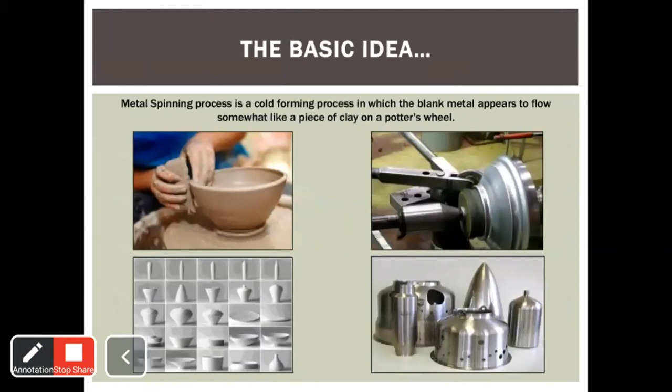Okay, so this is the basic idea about spinning. All of you just have a look at it. Metal spinning is a cold forming process in which the blank metal appears to flow somewhat like a piece of clay on a potter's wheel. So spinning means shaping a metal blank as it revolves at a high speed in a lathe.

It is one of the oldest methods of producing a wide range of goods which have an axis of rotation. For small batch production, spinning, because of the simplicity of the equipment needed and the ease with which a chuck can be prepared, often gives lower overall production cost than any other alternative method.

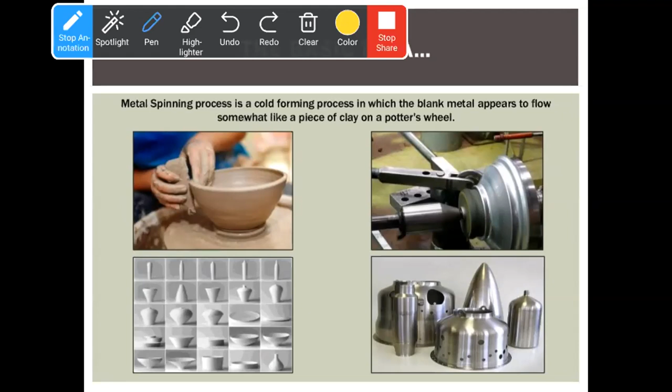So the process lends itself to the production of goods direct from a flat blank. It is also a very useful adjunct to the press and drop stamp. In the latter direction, it is used to finish articles that could not readily be handled by any other means. Hence, the spinning lathe is often used along with the press or drop stamp, or to trim, bead, burnish, or stroke over, neck down or spin a raising, cupping, or shell to the desired size and shape.

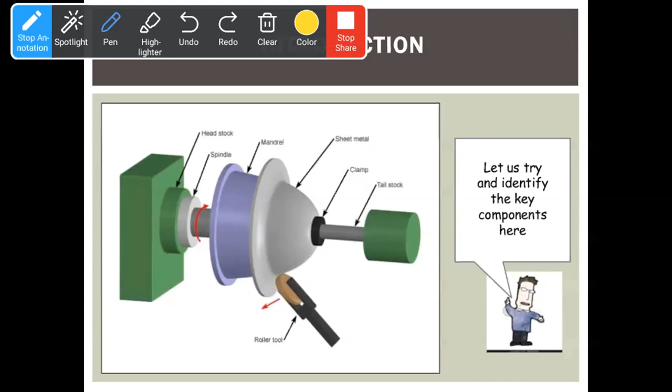In practice, metal spinning may be roughly grouped under two categories. So we can define this in this way. Here we basically have a metal disc or cylinder rotated at high speed on a CNC lathe or by hand, and by using specially designed tools, we get axially symmetric products.

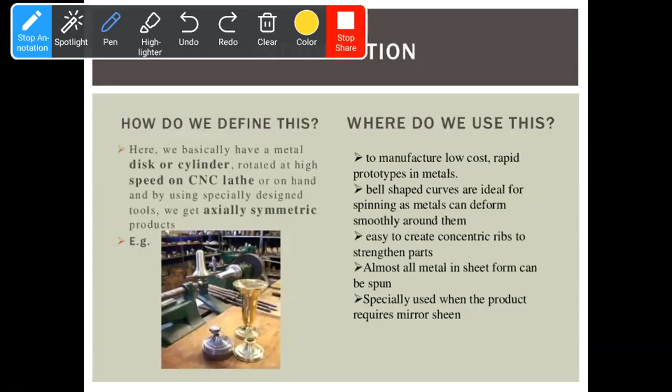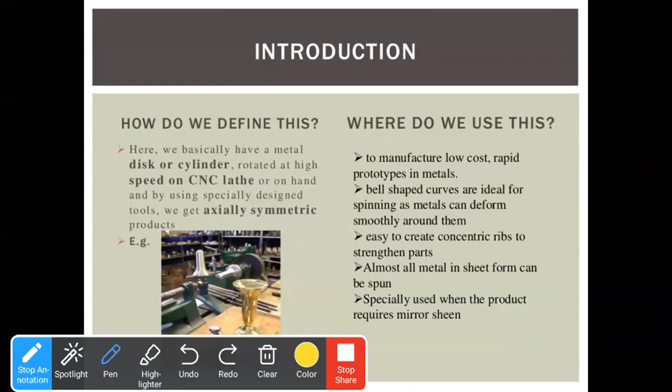Example - you can observe here. This method is used to manufacture low cost, rapid prototypes in metals. Bell-shaped curves are ideal for spinning as metals can deform smoothly around them. It's easy to create concentric ribs to strengthen parts. Almost all metal in sheet form can be spun, especially used when the product requires a mirror sheen.

So this is the everyday examples we can observe in our daily lives about spinning. This is the Coca-Cola can you can observe here. I always wondered how these commonly seen objects are made. Now finally I got these things - you can observe here. This is the Coca-Cola tin. You can see this is made by using spinning. This is the actual process working in our manufacturing department.

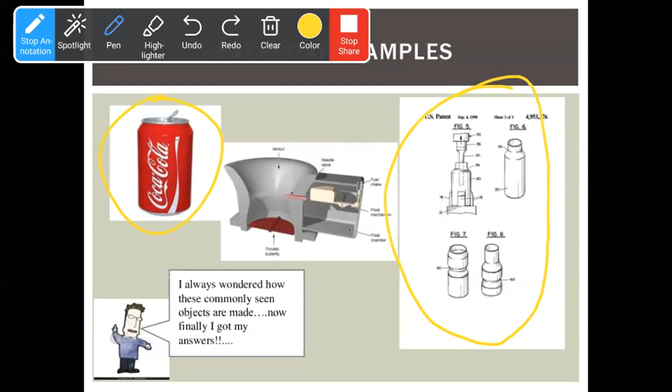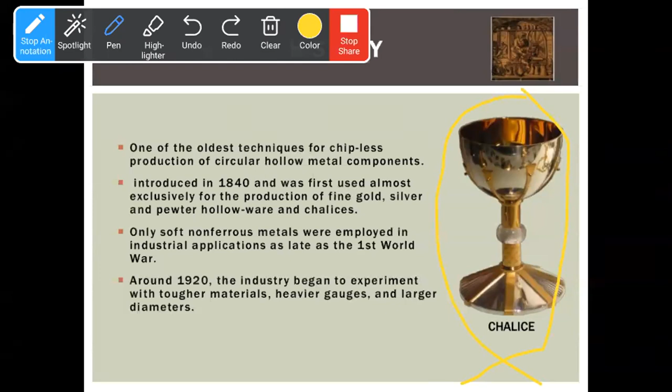Only soft non-ferrous metals were employed in industrial applications as late as the First World War. Around 1920, the industry began to experiment with tougher materials, heavier gauges, and larger diameters also.

So this is about the classification of metal spinning techniques. In metal spinning, one is conventional spinning, second is power spinning, and third is tube spinning. Conventional means nothing but manual hand spinning, practiced by pressing a tool against a circular metal preform. It involves no significant thinning of work metal, essentially a shaping process used for prototype manufacture or in production runs less than 1,000 pieces.

Coming to power spinning, metal is deformed using high shear forces, with use of automated CNC machines, significant thinning of metal preforms, suitable for high production runs.

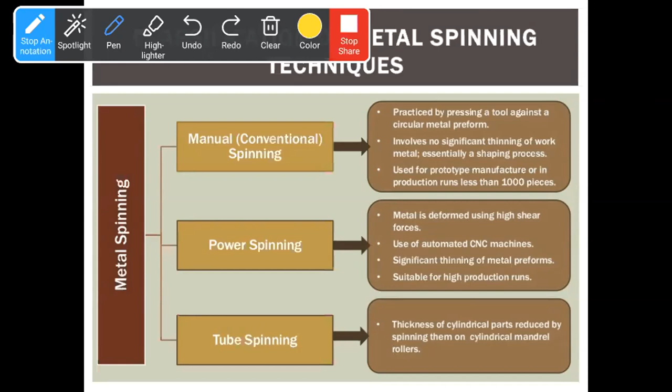Coming to tube spinning, the thickness of cylindrical parts is reduced by spinning them on cylindrical mandrel rollers.

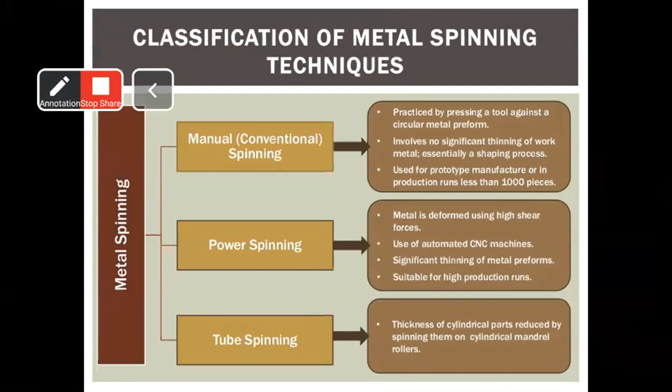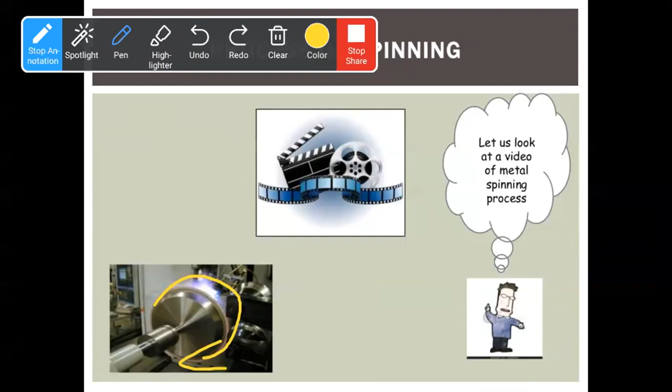So coming to this is the process of spinning. A disc of metal is revolved, as we already discussed.

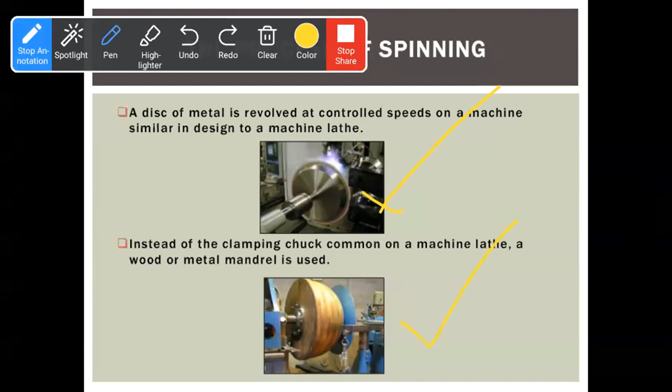A disc of metal is revolved at controlled speeds on a machine similar in design to a machine lathe. So this is one diagram, and this is another diagram. Instead of a clamping chuck common on a machine lathe, a wood or metal mandrel is used. And this is the process of metal spinning.

The external shape of the mandrel corresponds to the internal contour of the part to be produced. So this is the actual required part, and this is the supporting one. It gives shape to the particular sheet we have taken here. The blank is clamped between the spinning mandrel and a follower on the tailstock spindle. The mandrel, blank, and follower are then set in rotation at controlled speed.

So here are the spinning tools. Spinning tools or spinning rollers are forced against the rotating blank. In hand spinning, the blank revolves at high speed and is subjected to pressure from a steel tool exerted by the operator, who has the tool handle tucked under his right arm.

The tool is levered off a T-rest and is prevented from slipping by means of a peg. The leverage obtained is adjusted to suit the class of work being handled.

Skill in the use of these tools and experience in handling the varying classes of material is essential. If the metal is worked only in one place, it becomes work hardened, and the result may be cracking, buckling, or even tearing of the metal.

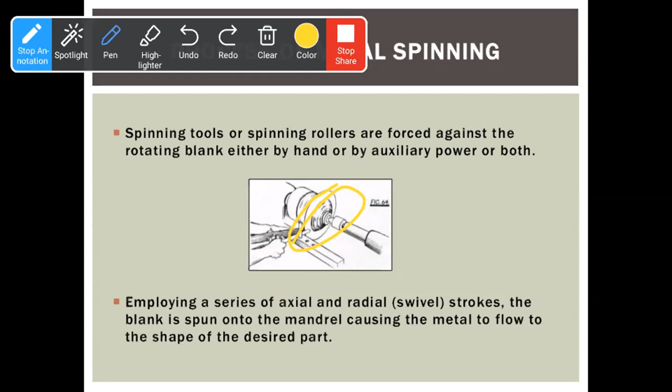The art in metal spinning lies in working the tool over the whole surface and coaxing the metal towards the desired cross section. As the work proceeds, the surface becomes work hardened, and it is necessary to resort to interstage annealing. So this is about hand spinning.

So this is the step-by-step process we follow in metal spinning. The first step is metal forming, the second is trimming, and the third is finishing.

What is happening in the first step, metal forming? This step involves laying down the material onto the mandrel. It is accomplished with short inside-to-outside moves, and the metal gets easier to form as the part gets closer to completion. So here you can observe this.

Coming to finishing, the third process, finishing is done at a very high RPM. That is, the maximum speed of the spun tool is almost 1200 RPM, so that a minimum of force needs to be applied and very smooth strokes can be used. The flat side of the duckbill spinning tool is used for straight surfaces, and the rounded side for curves and radii.

So coming to the mechanics of spinning, the most common application of metal spinning is for conical shapes.

Before knowing about the mechanics of spinning, we must also know about machine spinning. Machine spinning is very similar to manual spinning, but is always used in conjunction with a press to perform operations that cannot be readily done on the latter type of machine.

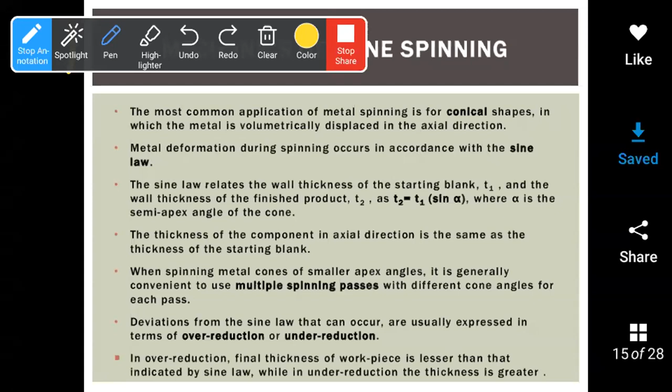The rollers are best made from a good alloy steel that will take a hard surface. For some jobs, a rocking slide is also fitted to the machine and used along with the compound rest. This permits such operations as trimming, as we have already discussed, and trimming and beading to be done at the same setting as spinning or burnishing.

One more thing to observe: spinning can be hand spinning, machine spinning, or hot spinning. So what about hot spinning?

Hot spinning of metals is similar to hand spinning, but it is used commercially to dish or form thick circular plates to shape over a revolving form block. A hot spinning machine is a combination of a vertical press and a large vertical spinning lathe which rotates about a vertical axis, so the power activated rollers do the forming as the part is rotated.

Metals up to 150 mm thickness can be hot spun. All of you keep a note of this: spinning of metals up to a thickness of 150 mm is routinely known for hot spun dished pressure vessels and tank shapes.

Hot spinning is also used to shape thinner plates of hard to form metals like titanium, which is one of the hardest materials.

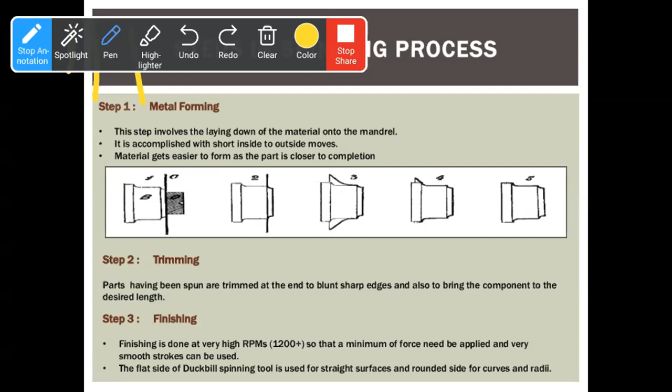Now about the advantages of the spinning process: some complex parts of reentrant shapes, such as kettles, can be produced economically. The second advantage is that equipment cost is very low, and the third advantage is low tool cost.

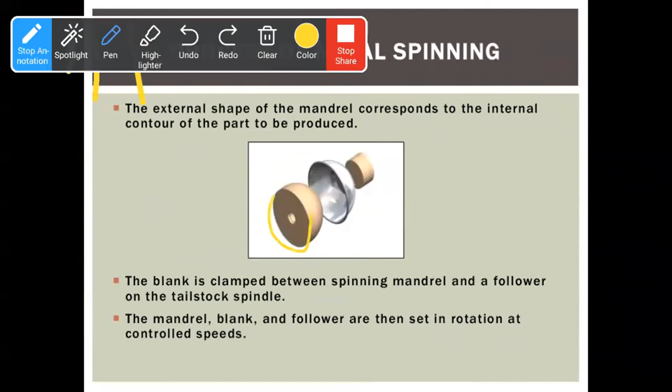We have already shown this form block here. This form block's cost is very low — that is the tool. And this is the sheet.

The external shape of the mandrel corresponds to the internal contour of the part to be produced. The blank is clamped between the spinning mandrel and a follower on the tailstock spindle.

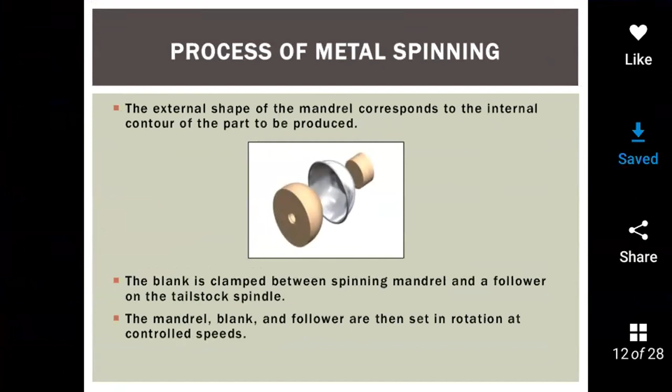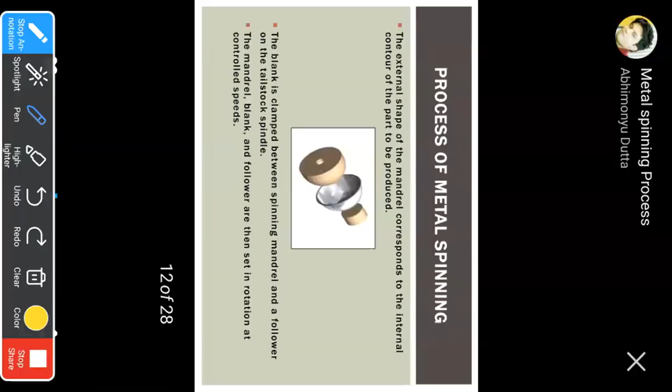The blank is clamped between the spinning mandrel and the follower on the tailstock spindle. The mandrel, blank, and follower are then set in rotation at a controlled speed.

There are some limitations here: finished parts are not always uniform, close tolerance cannot be maintained using spinning, and the spinning method depends to a large extent on the operator's skill. These are the two disadvantages or limitations, whatever we call them.

Coming to the applications: product applications of spinning include funnels, large processing kettles, rocket motor cases, reflectors, kitchenware, bells on musical instruments, etc.

We can compare spinning with drawing. Spinning is comparable to drawing for making cylindrical shaped parts because of the simple tools used in spinning. It is economical for smaller lots, but the time required for making a cup is more in spinning, and more skill is required in this process.

Thus, it is not suitable for large scale production. Complicated shapes and reentrant shapes are not feasible by drawing, but can be made by spinning using sectional and collapsible form blocks. Large parts are also much more easily made by spinning than by drawing.

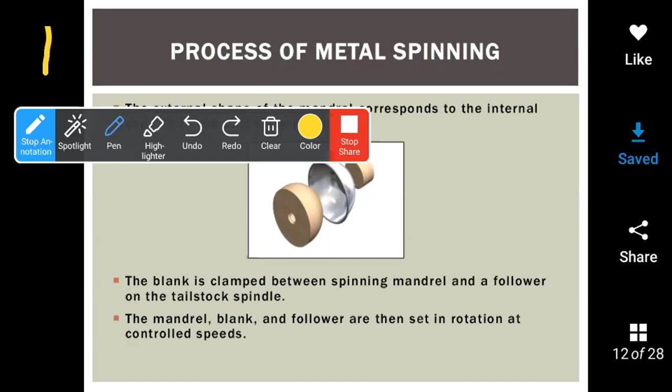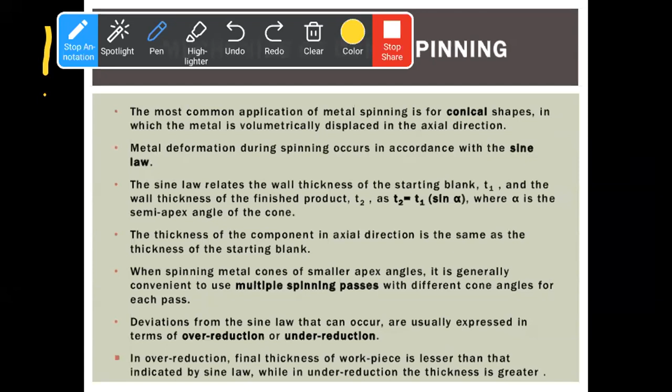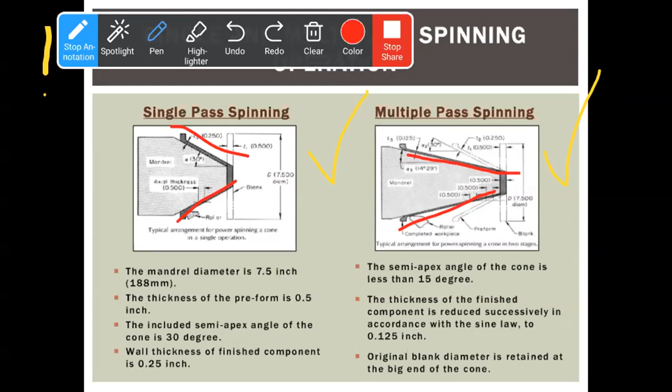The thickness of the finished component is reduced successively in accordance with the sine law to 0.125 inches. So original blank diameter is retained at the big end of the cone, at the big end of the cone.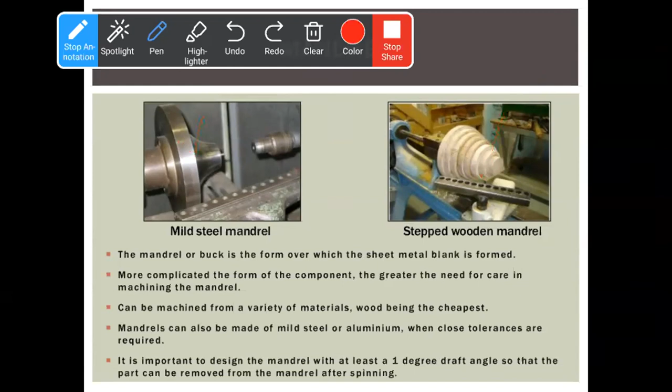So this is about the tools. Variety of tool profiles can be implemented for spinning the material into different shapes. Tools are provided with long handles to provide ample leverage to work the material down the mandrel. Tools can be up to 3 feet long with a 1-inch diameter steel rod forged into the preferred tool tip.

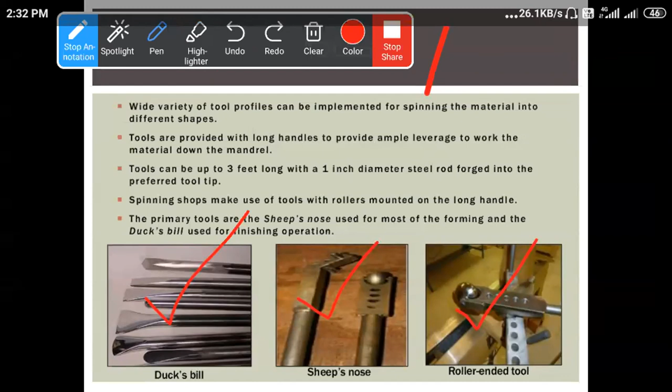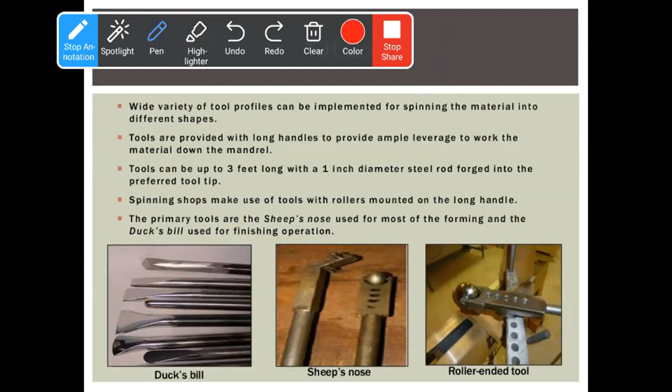You can observe here, these are all the duck bill. So you can observe this is the duck bill, this is the sheep's nose, and this is the roller ended tool. So these are the applications. Spinning shops make use of tools with rollers mounted on the long handle. The primary tools are sheep's nose used for most of the forming, and duck's bill used for finishing operations.

So these are all the lubricants we use in our spinning process. Lubricants are very essential in all metal spinning operations, regardless of the preform shape or composition or the type of metal spinning tools that are being used. They facilitate easy removal of the part from the mandrel and also help improve surface finish

of the finished component. Parts are lubricated both before and during the spinning operation. Commonly used lubricants include wax, tallows, soaps, and grease. So in selection of the most suitable lubricant, the ease of removal of the same after the forming process has to be considered.

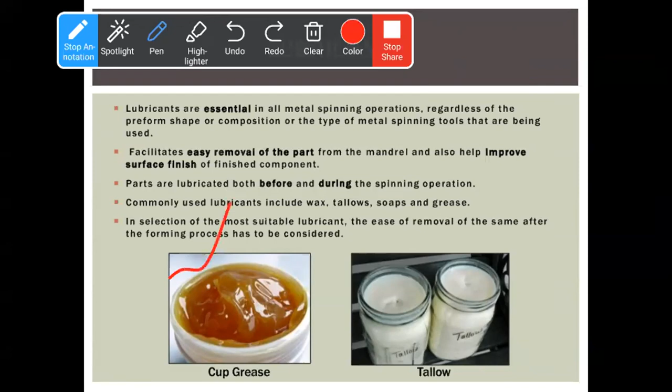So this is the cup grease, you can observe. So this is the tallows. So these are all different types of lubricants.

So machines for spinning - what are the machines for spinning? Machines for spinning are specified by the diameter and length of the largest component that can be spun. They are also specified by the maximum load that can be applied to the work. The capacity of the spinning machines ranges from 0.455 meters in diameter and 0.380 meters in length to 6 meters in diameter and 6 meters in length.

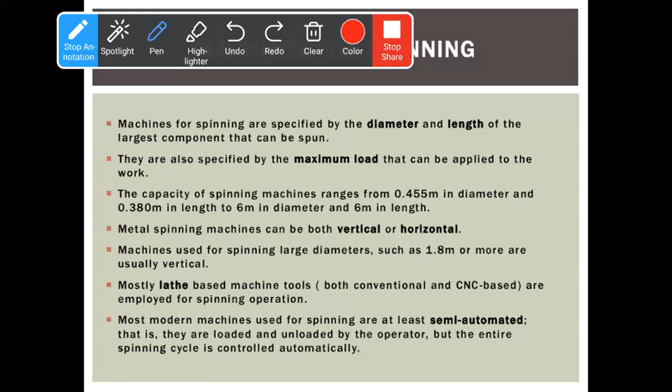Metal spinning machines can be both vertical or horizontal. Machines used for spinning large diameters such as 1.8 meters or more are usually vertical. Mostly lathe-based machine tools, both conventional and CNC based, are employed for spinning operation. Most modern machines used for spinning are at least semi-automated, that is, they are loaded and unloaded by the operator, but the entire spinning cycle is controlled automatically.

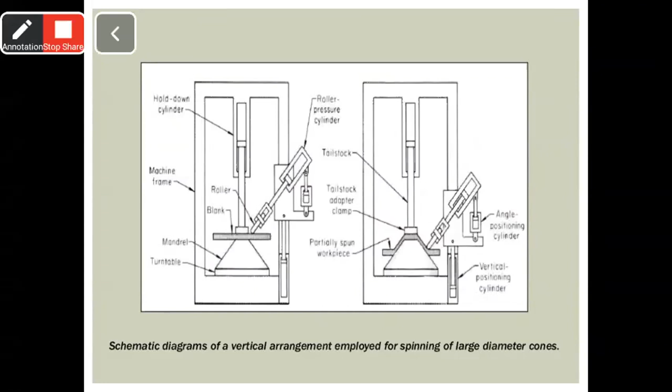This is the schematic diagram for a vertical arrangement employed for spinning large diameter cones. This is the spinning process machine, the first one. You can observe a horizontal lathe and mandrel arrangement for spinning a large diameter cone.

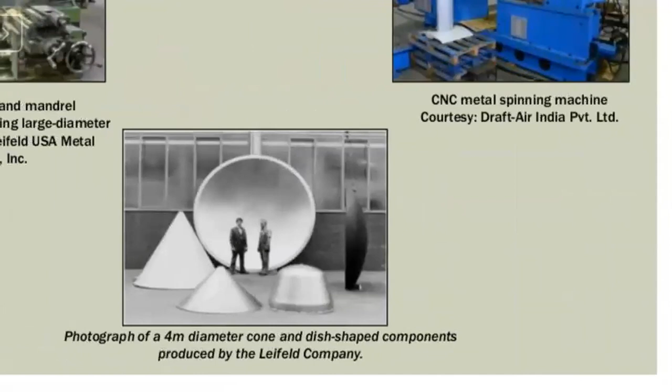This is the USA metal spinning process. This is a photograph of 4m diameter cone and dish-shaped components produced by Leifeld Company.

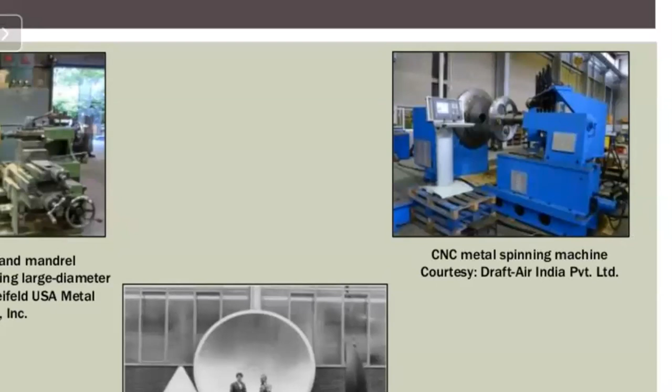This is a CNC metal spinning machine from Draft Air India Private Limited. This is the operating condition in our Draft Air India Private Limited. It is purely an India manufacturing company.

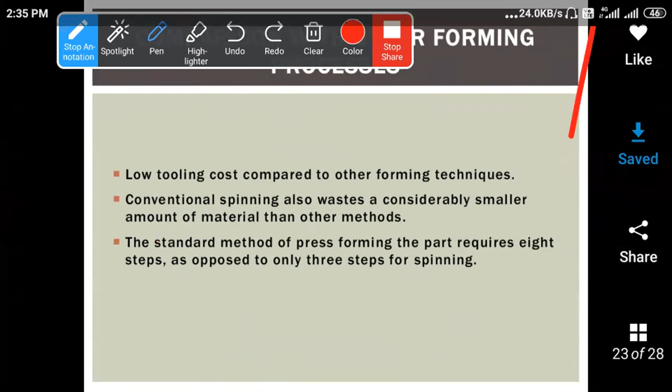Coming to the comparison, low tooling cost compared to other forming techniques, as we already discussed. Conventional spinning also wastes a considerably smaller amount of material than other methods. And the standard method of press forming requires 8 steps as opposed to only 3 steps for spinning.

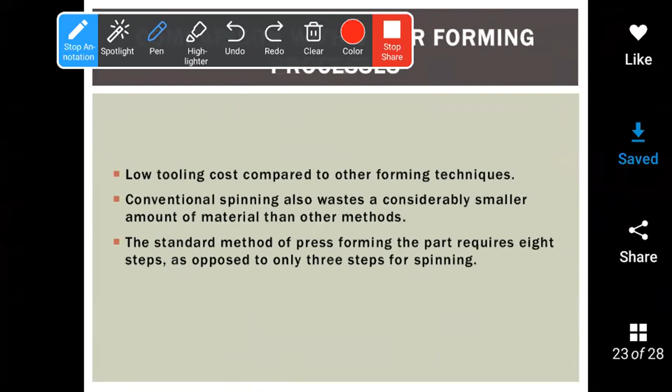Coming to the merits: it provides natural metallurgical benefits with a refined and strengthened grain structure. Cold working of the metal also increases tensile properties appreciably.

Unlike a casting, a spun part will not be discarded by a hidden blowhole or inclusion.

A spun shell could be made in halves and welded to form a single unit without complex, expensive tooling. The tooling costs and capital investments are relatively small. The setup time is less. Design changes in the workpiece can be accommodated at relatively low cost.

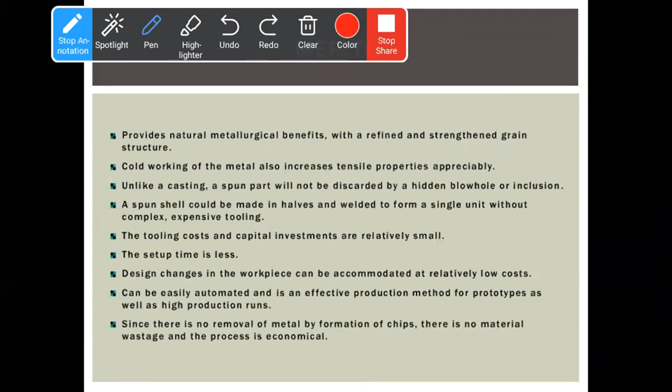Can be easily automated and is an effective

Due to a network or signal problem, it had been coming back. So sometimes this is happening, right?

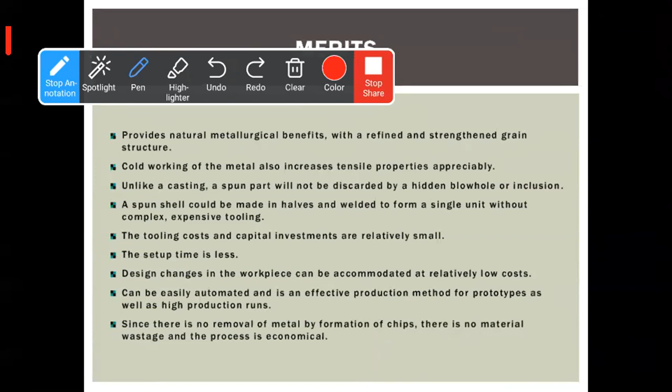So design changes in the workpiece can be accommodated at a relatively low cost, and it can be easily automated and is an effective production method for prototypes as well as high production runs. Since there is no removal of metal by formation of chips, there is no material wastage, and the process is economical. So these are the demerits.

Coming to the demerits: requirement of highly trained operators in the manual spinning process, as the uniformity of the product depends to a large degree on the skill of the operator.

Manual metal spinning is usually significantly slower than press forging. Deformation loads allowable are much lower in metal spinning than in press forging.

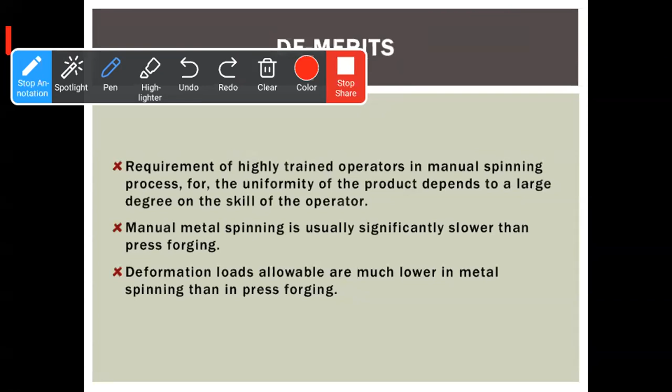So these are the applications. The following are the applications of products that can be manufactured by metal spinning.

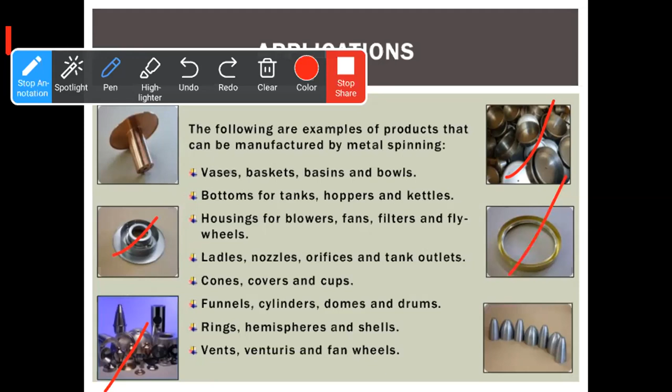Starting with kitchenware, these are the vases and ladles and nozzles, and these are the orifices, and these are the rings, and these are the domes, and these are maybe the hoppers. So these are all the different applications we have taken into consideration for metal spinning.

Vases, baskets, basins, and bowls. Bottoms for tanks, hoppers, and kettles. Housing for blowers, fans, filters, and flywheels. Ladles, nozzles, orifices, and tank outlets. Cones, covers, and cups, and funnels, cylinders, domes, and drums. Rings, hemispheres, and shells. Vents and venturis, and fan wheels.

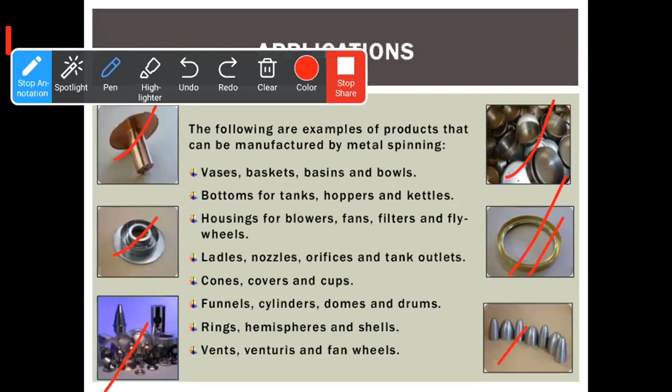So we have so many applications in metal spinning. These are about the conclusions. Metal spinning techniques and mechanics have been presented here.

Equipment for spinning is based on lathe technology. A wide range of products can be obtained using this technique. Metal spinning is competitive with other forming processes such as pressing and deep drawing. It is an economical technique to produce both simple and complicated parts for single application, low volume production as well as mass production. Process technology, equipment, and tooling for spinning have been discussed.

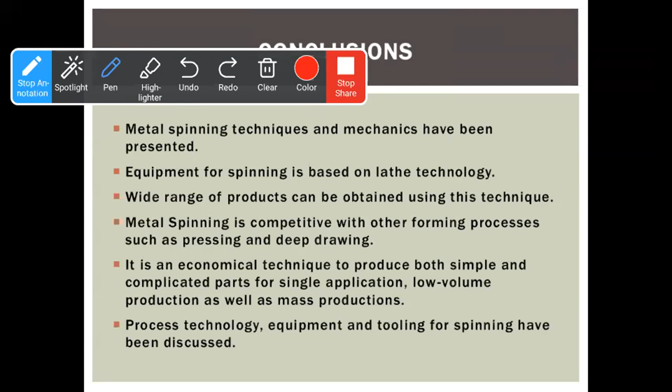So this is about metal spinning. Okay, thank you.